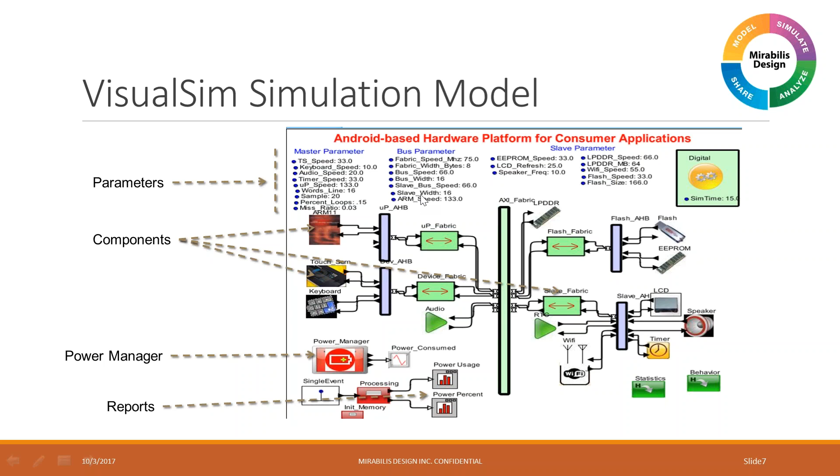There are a lot of reports and analysis tools built into the environment that you can drag and drop and utilize. And finally, there is the most important, the power analysis environment that gives you a complete power profile down to the device, application, and the subsystem level. So this is a complete platform that enables you to assemble your systems and then set up parameters for which you can do regression analysis through a parameter sweep process.

Some of the statistics that are generated, and we'll be going more into it, is you can get statistics in terms of timing diagrams, the latency or throughput, and power consumption. You can also get textual statistics that give you things like utilization, delays, buffer occupancies, and also statistics on a per device basis to give you an idea of what the cumulative average power is and things like that. What this allows you to do is very quickly narrow down what my architecture is going to look like and also where my system bottlenecks are. So very, very quickly, it gives you visibility into that type of information.

Now, VisualSim has a large library of predefined components. So it can range anything from processors to interfaces to memories to storage to networking components, but also a lot of components for you to build your own custom elements, such as, say, a latch, which you want to define for your hardware, or say, for example, a buffer with an arbitration scheme, has components to allow you to enable those as well.

Now, one of the key things VisualSim allows you to do is be able to provide a universal communication platform. So once the architect has constructed the model, done the analysis, tested it, and fully validated, it can be embedded in your document that can then be utilized by anybody else downstream for actually analyzing the system or using it for demonstration or generating reports that can be used for marketing purposes, things like that.

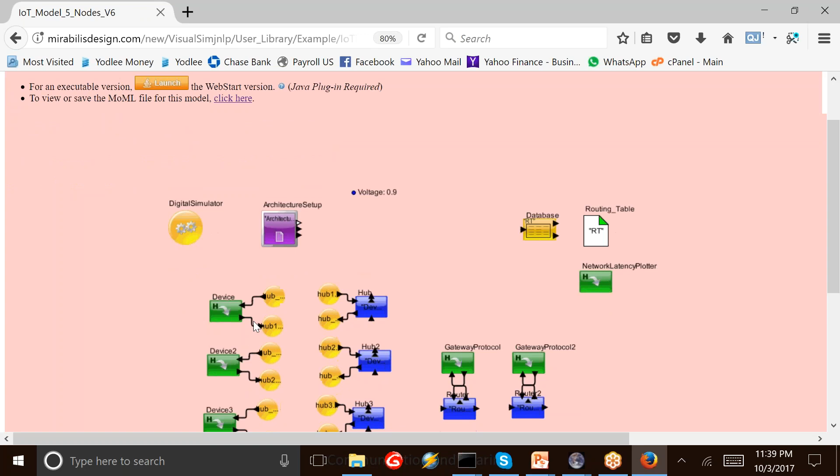So this is from our server in Florida, and as you can see, I'm actually bringing up these designs that have already been pre-built. In this particular case, it's an IoT-based architecture that I'm demonstrating right now. So when you create a model, one of the things you have the ability to do is generate documentation right out of the model. So for example, over here, I can run this and I can immediately see what are the attributes that are associated with that particular component. Or for example, on some of the networking things.

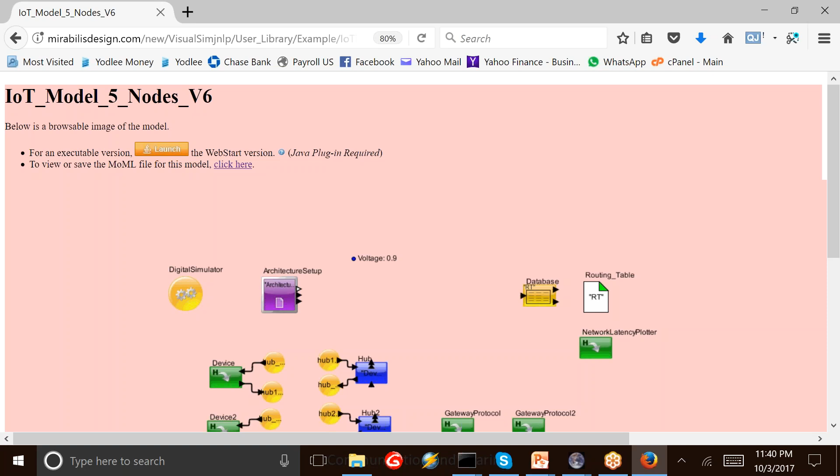But what I can also do right out of the documentation is I can actually click on this launch button and bring up the simulation model right from within the web browser. So anyone that has a need, say, they want to analyze their firmware algorithm, or they want to try to use a different NAND flash, or a different variation of the ARM processor, they just need to go change some parameters from within the browser, and they have the ability to get access to the model and run simulations right from within your document itself. So it allows you to extend the use of the model beyond just the architect's environment.

As you can see, it's coming up. The first time around, it takes a while to come up, but after that, it's extremely fast. In this particular case, I also have a lot of bandwidth on the GoToMeeting activities, so that's another reason why it can be a little slow sometimes.

So as you can see, this is a VisualSim model. You can see the libraries on the left-hand side. I can double-click on blocks, and it can show up its parameters. All from within the browser, I can click on this Go button, and it'll actually run the simulation as well. So it allows you to be able to communicate across your entire design chain.

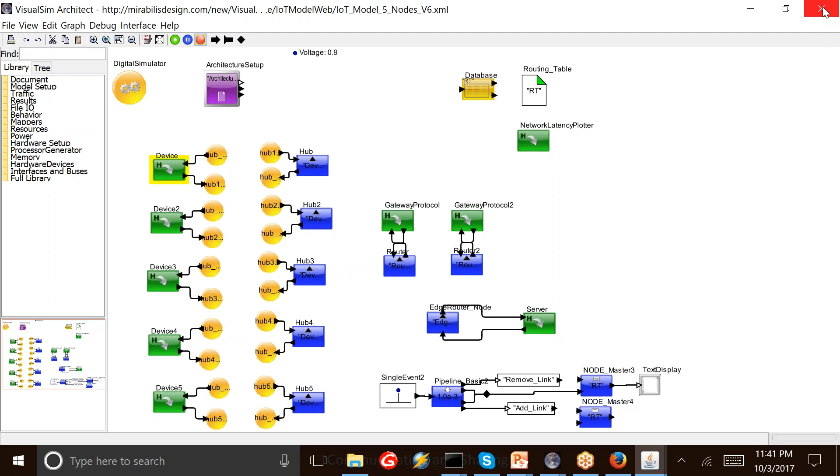Now, going back to the presentation, let's take a first look at the introduction to the network on chip. But before we do that, we want to look at all the possible on-chip communication components available. So when you look at common on-chip things, it can be network on chip, obviously, but you have point-to-point, token ring, crossbar, shared bus. There's a variety of different architectures.

And the selection of your communication architecture has a major role in terms of what is going to be the size of the chip, how many devices you can connect, what is going to be the response times, what is going to be the total power consumption of the SoC. All of them have a major impact based on the on-chip communication that you select. Also remember that even though you might have a network on chip, it does not mean that the network on chip is the only interface or bus on the SoC itself. There might be a lot of legacy systems that might require PCI Express or NVMe Express, or might require AXI with an ARM processor. All of that will also have to be considered when you're looking at the SoC.

Now, the specific topology or the specific communication interface that you need to use for your architecture really has a lot of the impact based on how many cores you're using, what type of cores, hardware accelerators. Are you looking at things like cache coherency? What is the available memory bandwidth?

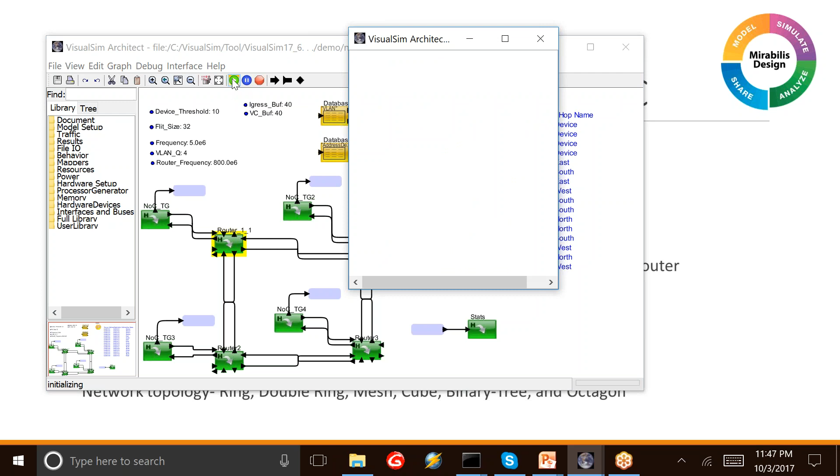So I can construct a model using these standard components out of the library, and when I click go, a variety of statistics are going to come up based on the attributes that I've set up for those traffic generators that emulate the different devices. So here, for example, you can actually see the buffer occupancy for each of the routers over here for the different directions of their connectivity.

But what you can also see is things like what is my end-to-end latency. Notice there's a spike in your response time, but after a while it follows a small range. So it says that the buffering is actually tapering it off so that you cannot have more data. Most likely it's actually dropping some data right there.

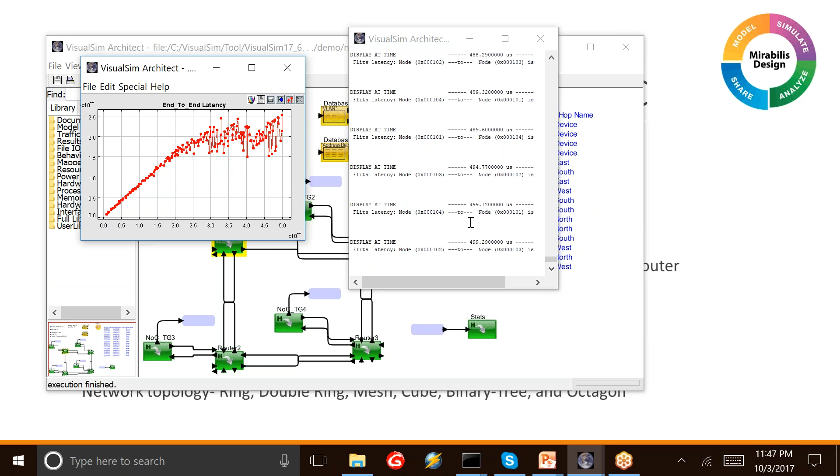Now what you can also see here is the latency from node to node during the tracing process. So it allows you to gain visibility into your entire architecture.

So using this, you can connect different types of architecture. In this case, as I said, it's a mesh. You can make it into a ring architecture. You can make it into other types of architecture as well. These blocks automatically support that.

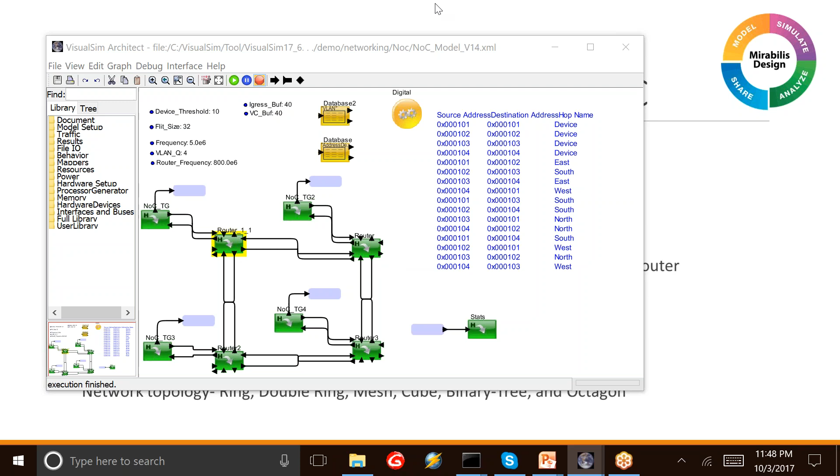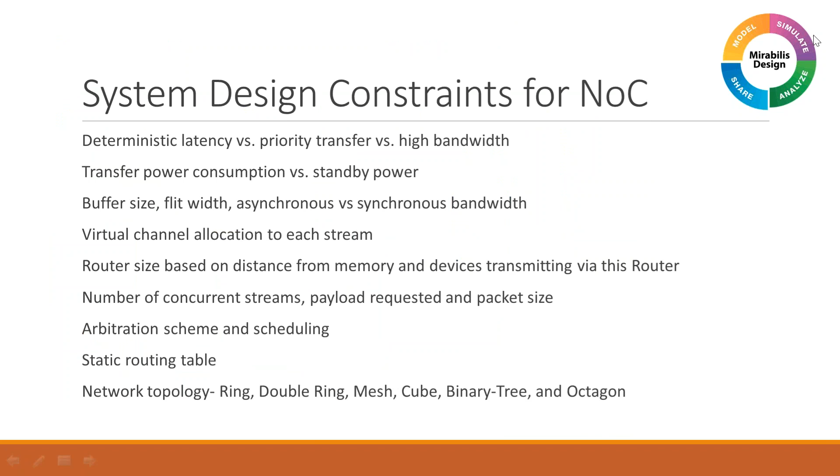Now, one of the key things to think about when you're creating something new like a network on chip is that you need to have a platform where you can explore or evaluate the different possible architectures. So one of the things we at Mirabilis Design provide is a modeling and simulation platform. And this platform has a large portion of the components you need to assemble the system.

So for example, as I showed you, it has a router, and the router has buffering, timing latch, and static routing table. Also, as I showed you, you can actually change the configuration to go from a mesh to a ring to some other configuration.

As you saw in the list, we also have a large library of components like PCI Express or AXI bus or AHB or NVMe Express or DDR4 or LPDDR or ARM processors or other types of technologies. So the idea is that you can take not just the network on chip, but actually assemble the full SoC into your system model.

One of the key aspects of network on chip, which is a major problem today, is simulation time. Because these NoCs get really large and the routers get really big, if you do a cycle accurate model, it tends to slow down extremely fast. And that's one of the problems the library blocks we provide eliminate, where it maintains cycle accuracy but still provides you the flexibility to try different regression simulations and do it very, very fast.

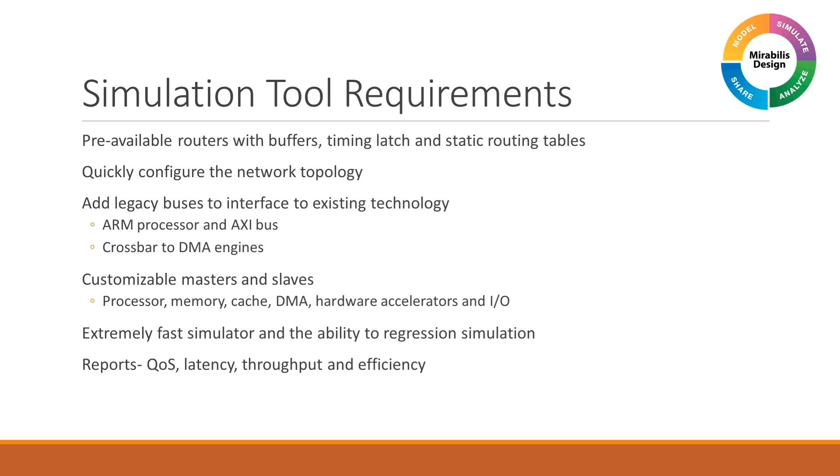Now, why do you do system design? One of the reasons is in the past there was always a dedicated flow from source to destination, or master to slave. Now, in today's systems, you have a few different things. One is there's going to be a lot of contention on the buses.

The second is there's going to be multiple concurrent tasks running that have to be scheduled, which means it's no longer just data going to task 1, task 2, task 3, task 4 in 4 different devices, but rather they're all distributed, and they're competing for access to systems based on additional tasks or additional data packets that might be processed through the particular system.

So when you have something like this, the topology is really motivated by what is happening in your software tasks running on top of this particular system. So for this particular design that we just showed you, we ran a simulation where we did a test between 200 megahertz and 400 megahertz.

The 200 megahertz, as you can see, had higher latency in most of the cases, except at a few points here where the 400 megahertz actually took more response time. So what this tells you is that just increasing your bandwidth or your clock speed does not necessarily guarantee better performance.

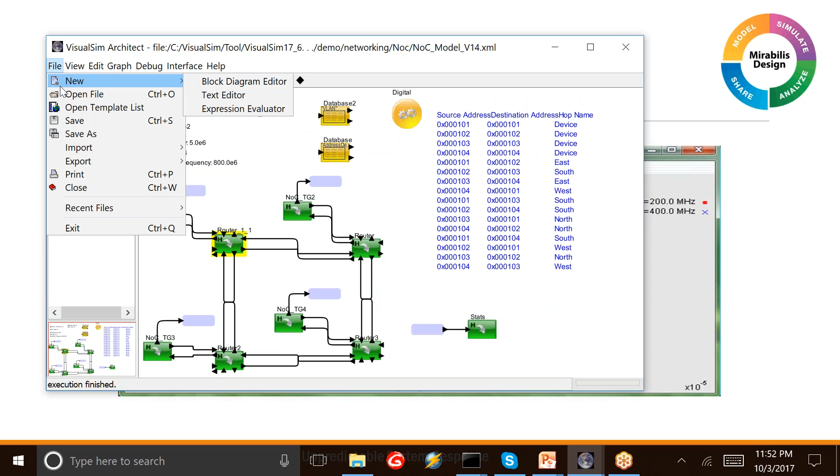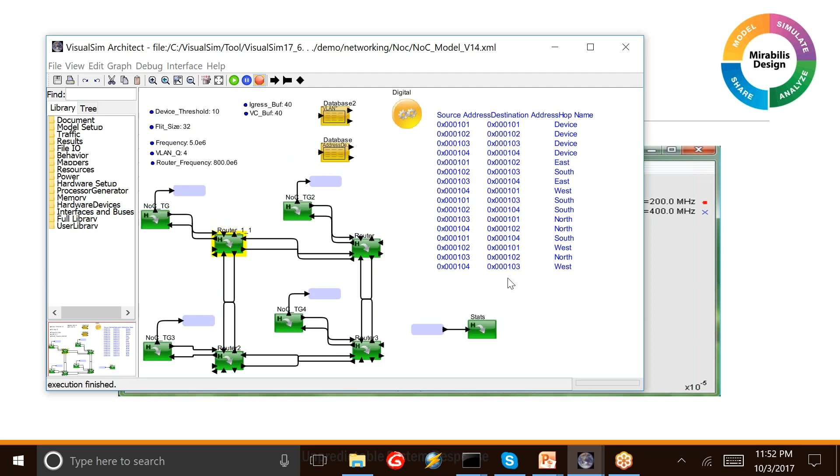So one of the things you'll notice in VisualSim is that we have a large library of demonstration systems, or what we call application templates, available in the environment. The reason is it allows you to very quickly build up the models that pertain to your particular system.

So as you can see, this is the block diagram of the architecture that we saw earlier. These are the two software flows. We've got other types of statistics like the power tables, statistics, analysis tools, reports, things like that. We also have tables here that are the parameters that are used for regression analysis. We're going to go ahead and run the simulation. And one of the things you're going to see is that there's going to be a variety of statistics.

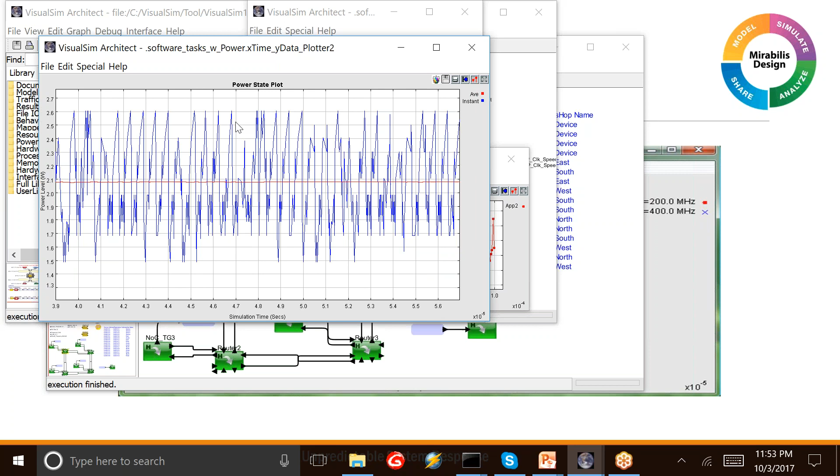So for example, this one here shows me the red line, the average power, while these peaks here show me what my instantaneous power is. So one of the things you'll notice is that most of the time the power is below this range here, and there are just a few peaks up here that actually increase my cooling cost that I have to be aware of. So this allows me to know in advance, at least provide input to the mechanical guys on what my expected power consumption or energy is going to look like.

You get other types of statistics, like for example, a breakdown of how much of it is the messaging part, which is the data transfer or data movement, versus how much of it was the actual processing. So if you look in application 1, you'll notice the processing is these red things, but the transfer, which is going across the buses, is the blue. While in the case of application 2, you'll notice that the processing is a much higher percentage, while the actual transfer is much smaller. So this is only the transfer, while the light greens over here are the actual processing.

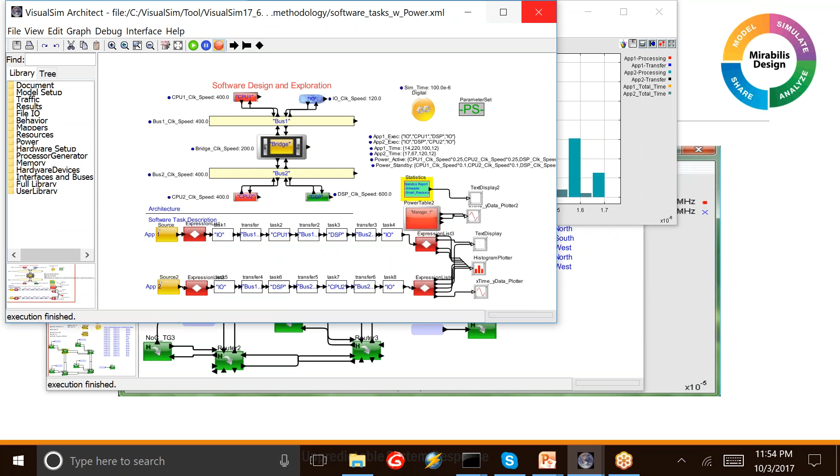So you can see one of them has more impact on the buses themselves, while the other one has more impact on the processing resources. So you can actually evaluate where your bottlenecks are or what resources require more adjustment in your architecture based on a simulation model of this kind. And that's where you can really figure out where you're going to have these kind of unpredictable responses in your particular design.

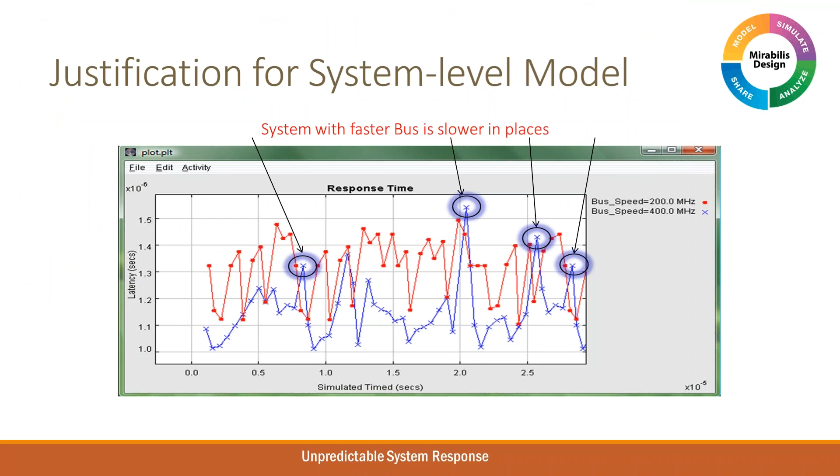Now let's look at the network on chip. One of the things that you do in VisualSim is you don't actually build these models at an RTL or SystemC level. Rather, you have the ability to define the entire chip right over here, but you don't actually put in, for example, each of the wires and things like that. Rather, you have your input port, your output port, which is resembled by this, an input buffer, an output buffer. It has the power, which is using our power library, but the actual data movement is done through what are called transactions. That's why we call this a transaction level model.

Now, the actual data movement through the system still happens the same way. It still incorporates the latencies associated with the handshaking and things like that, but we don't have separate wiring here for writing and reading and things like that. So if you look at a comparison between an RTL or a pin level model and a system model, all the attributes, your width, your clock speeds, your buffer depth, your scheduling algorithms, your arbitration, all of that is maintained. But what is not maintained is I don't have a pin by pin, rather I just send one transaction that actually takes care of all the pins and also takes care of the handshaking process. The data and control logic is still maintained.

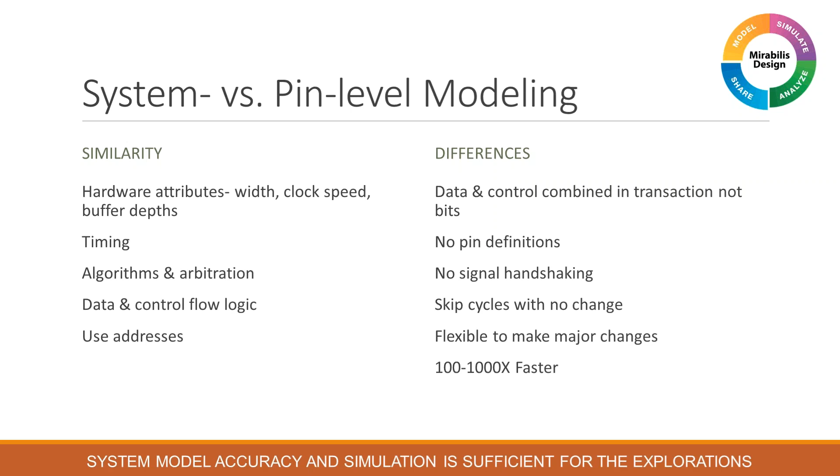Now, let's take specifically the network on chip library that we provide you in VisualSim. If you look at any one of them, there are essentially about 5 aspects that you require to be able to define the network on chip. The first and foremost are the traffic generators, which essentially resemble the devices. The second are the routers.

So for example, the routers have a variety of parameters: frequency, the coordinates, which is where it's located, the ingress buffers, the virtual channel buffers for each of them, the router addresses, the VLAN clock cycles for each of the virtual channels, things like that.

The traffic generators themselves, you need things like, for example, what is a frequency rate, what is the data size range, because now we're talking about packets. What is the data size range? What's the flit width? Which VLAN is each one of these streams associated with? All of that kind of information. So this describes your topology and your host devices.

Outside of that, what you do have is you need to have something that tells you what your VLANs are and what is the bandwidth, what is your static routing table, and then you have a series of parameters and statistics library components that are utilized for you to be able to run regressions and get the reports out. So these are the 5 elements that are required to assemble a complete network on chip design.

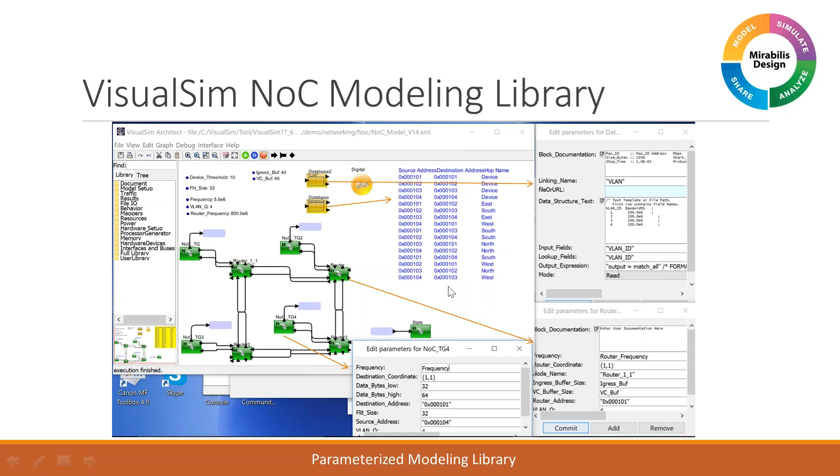Now, these blocks here are fully scalable, where I can just have 20 of these blocks, and it becomes a different type of topology. So I do have the ability to very quickly create alternate topologies as well. Now, a variety of predefined reports.

Some things show you the latency of the packets going from a source to destination, show you what my end-to-end response times are, show what the buffer occupancy is for each of the routers in each of the directions. So you can actually see which direction is consuming. Like, for example, over here, you can see the south port, router 1.1 and the buffer length. That's the one that's being buffered the most.

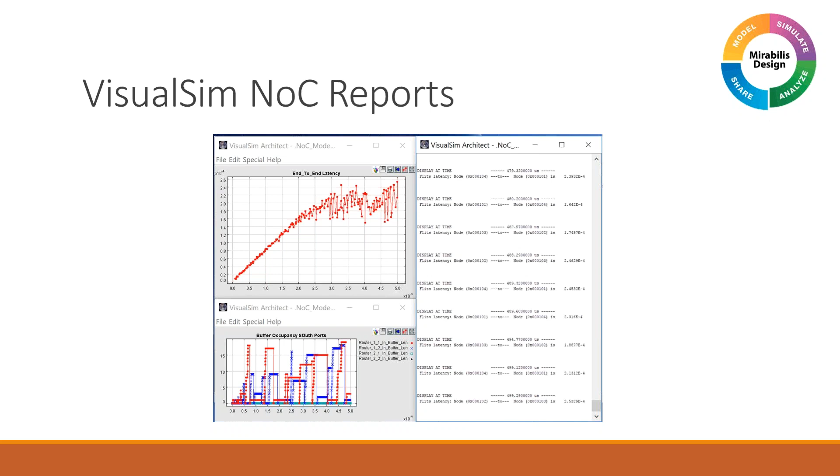And then you can see the green one, which is router 2.1. Notice there's hardly any buffering. So this tells me that there's a lot of activity right now in the south port for buffer 1.1 and for buffer 1.2. So those I have to look at. Do I want to distribute the traffic to some of the other nodes as well? So that would be part of your regression analysis that you'd want to run.

Now, an alternate to a very detailed or cycle accurate network on chip is, a lot of times people don't implement a very rigid network on chip. They use a more flexible mechanism where it's partially network on chip, partially a router, partially a switch, and then maybe partially even just an AXI bus. So what we've done is we provide you a variety of components.

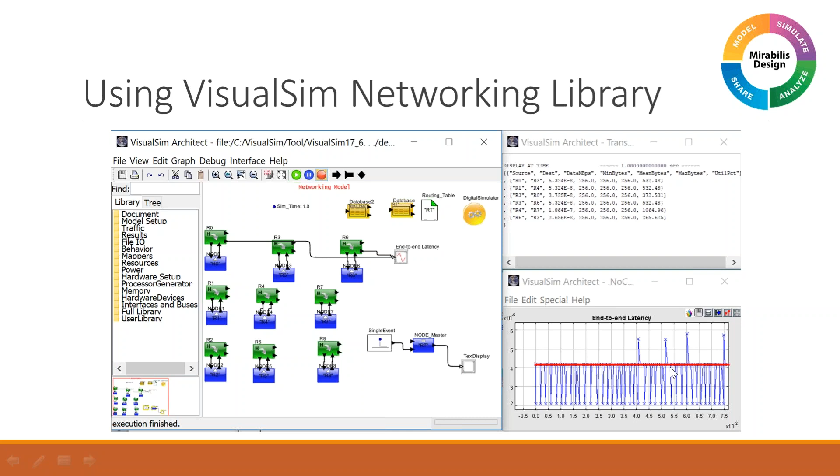Of course, we provide network on chip, but this is more of a routing system with nodes associated with each of the destinations. We provide you this kind of a library where you can still get the routing table, and you can get statistics on each of the links. You can get what your end-to-end response times are, while at the same time, you can also incorporate details of the rest of your hardware. As I mentioned, things like the AXI, the traffic generators, your processor, things like that.

Now, one of the key things you can do in VisualSim: what we saw until now was really about putting the performance together and putting the functionalities, like in terms of arbitration and scheduling. What you can also do in VisualSim is actually combine it with the power consumption in your system. Most times today, power is done using just an Excel spreadsheet or maybe some simple Python scripts.

But one of the things we've noticed is you reuse the same thing, but then when you run the simulation in a more discrete event, dynamic simulation, what you'll notice is your expectation here, which could have been a combination of taking the average of these and putting it in, or taking the worst case, is completely off from what really ends up happening through the particular design.

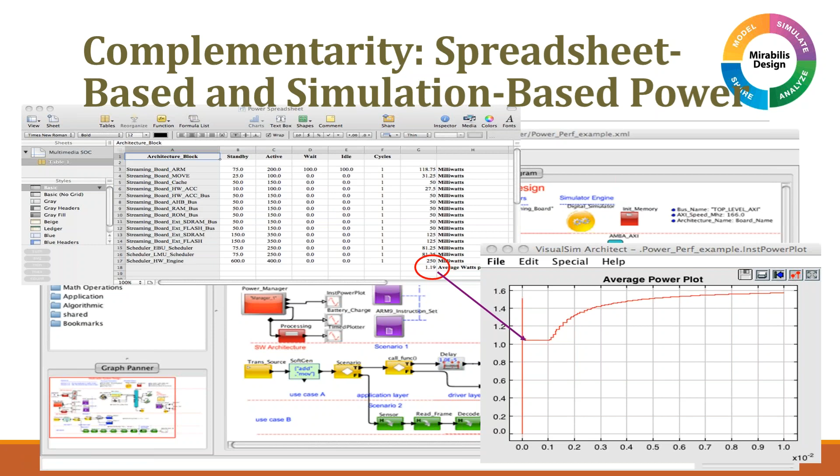So as you actually are sending real packets through it based on different device requirements and based on their different commands, read and write commands to memory, for example, the power consumption will look dramatically different. So it allows you to take an analytical spreadsheet model and extend it into more of a simulation-based power analysis.

Now, when I look at power, there's a lot of reports that I can look at. For example, I can see what the battery charge was. I can look at what's the instantaneous power and the average, what was the application response time, what was the total power discharge.

So it's a variety of statistics that can be generated right out of the power library. In addition to that, we also give you a trace of exactly what state each device was in over the period of the simulation as a timing diagram, and also as an XML file that you can potentially import into an FSDB that can be used to run in your RTL environment as well for your power verification. We also generate a lot of these into Excel spreadsheets that you can then use either for marketing or even for presentation purposes as well.

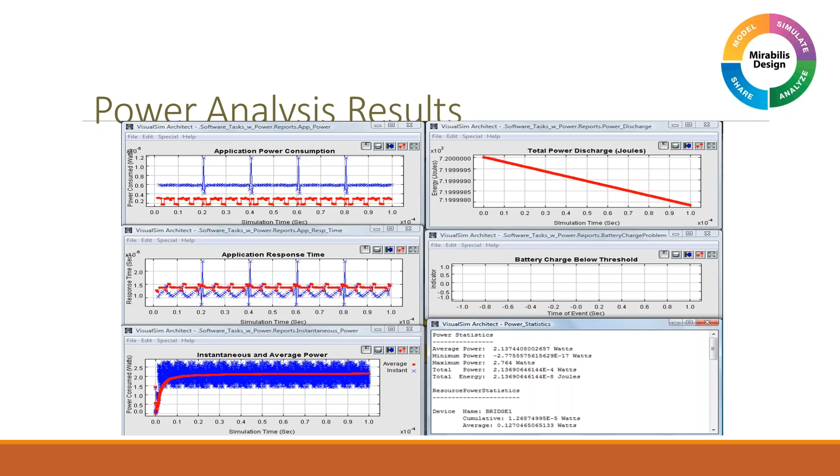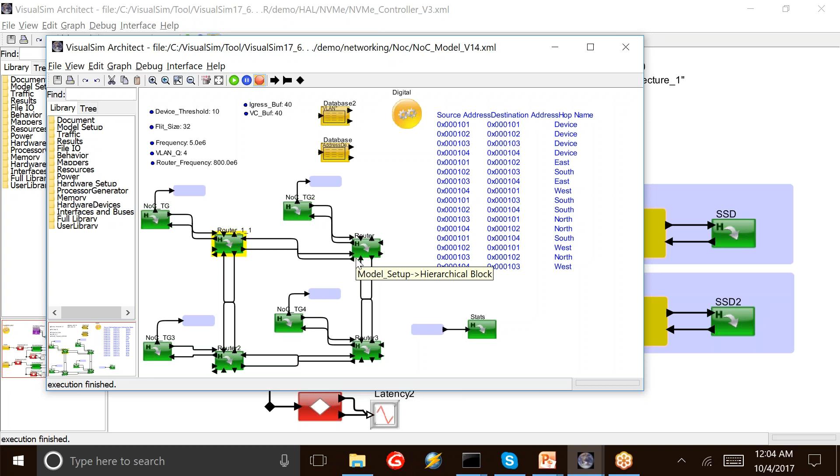Now, with this, I wanted to go into some of the demonstrations that we have constructed in VisualSim. So, for example, over here, what we have is an architecture that uses two different types of topologies in the same system. What you saw earlier on with the first design is it was purely a network on chip. So there was only one single technology that was utilized to assemble the system. Now here, actually it's not the right model.

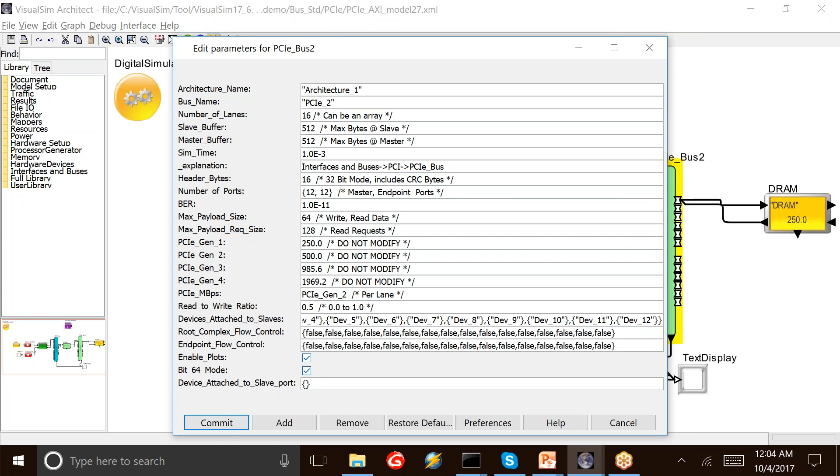Here, for example, I can combine a detailed AXI bus, and notice the number of parameters associated here to create a cycle accurate AXI bus, and combine that with a cycle accurate PCI Express, and I can enter in a DDR3 or a DDR4 DRAM block as well. So you can combine all of these within the system.

You can even take it one step further, where the PCI Express could have an NVMe controller running on top of the PCI Express. So it's possible that you can have your network on chip connect to an AXI, connect to a PCI Express which has NVM Express on top of it. So it allows you to put your legacy, your new generation, and a network on chip all within the same design as well.

Now, when you run some of these simulations, each of the simulations, depending on what analysis you're trying to do, will give you a completely different output or completely different statistics. So for example, over here, you can see it's showing you the statistics. I'm just going to let it run for a few seconds. Now this one is running for about 150 microseconds.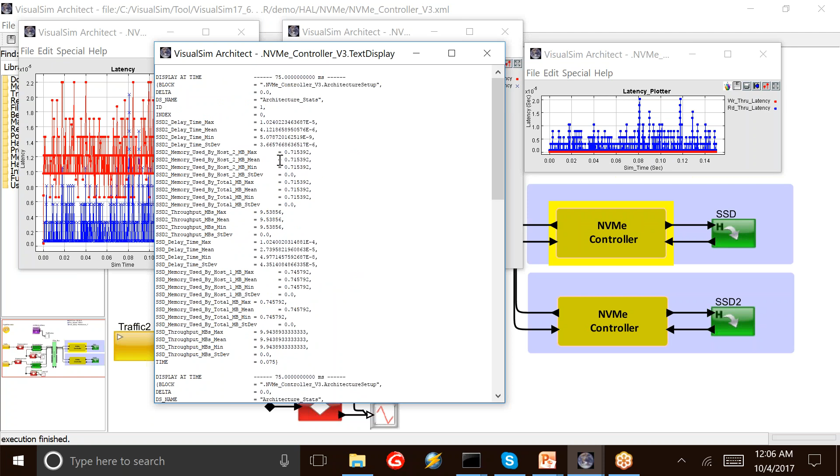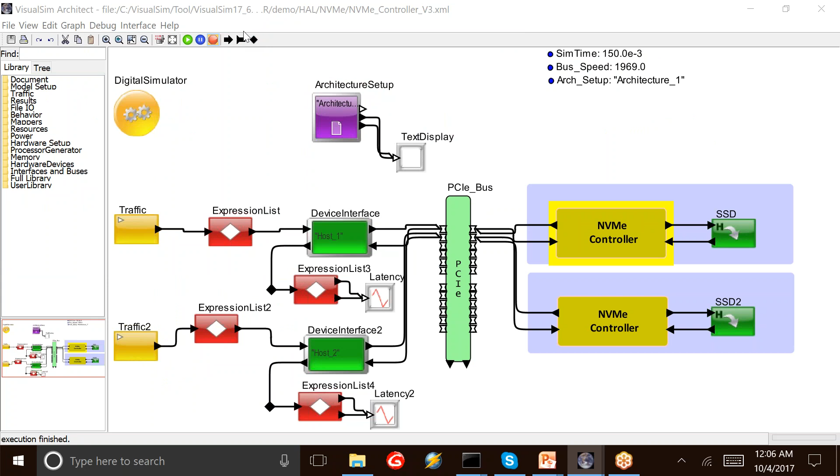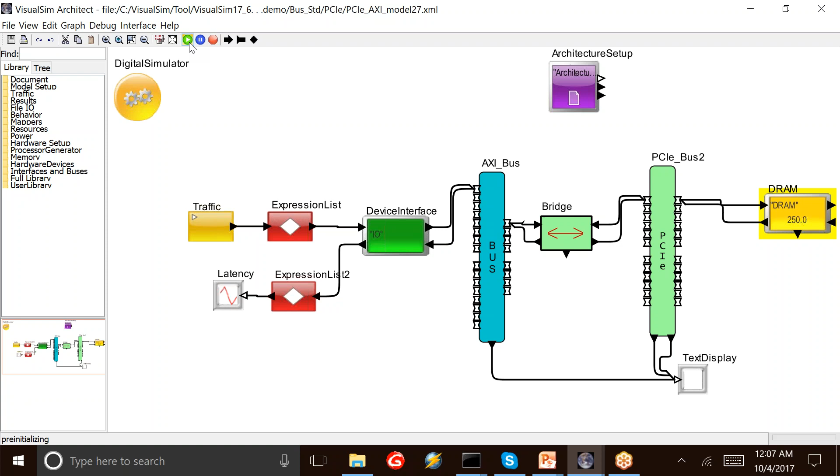So the main idea is that when I create a model and I run a simulation, I automatically get all these predefined reports that help me make decisions on what my topology or my architecture should look like. So for example, same thing, but here it has an AXI bus as well. When I rerun this simulation, I'm going to get a completely different set of statistics out of the particular design.

In this particular case, in addition to the standard statistics, I'm also getting a detailed report, like a trace on which slave. I get, for each of the queues, who's doing what, but I also get, when the slave comes in with the data, whether it was a read, which ID, which source and destination, what the data size is. So I can get detailed statistics or detailed reports on what is happening through the particular system.

So that way I can identify if there are any system bottlenecks that might be occurring as a result of either a stream generating a huge amount of data, or very large size data, like say video data, that might be causing some of these systems to slow down, causing some other streams to have a more extended bandwidth or a larger latency, while this video consumes a much larger bandwidth.

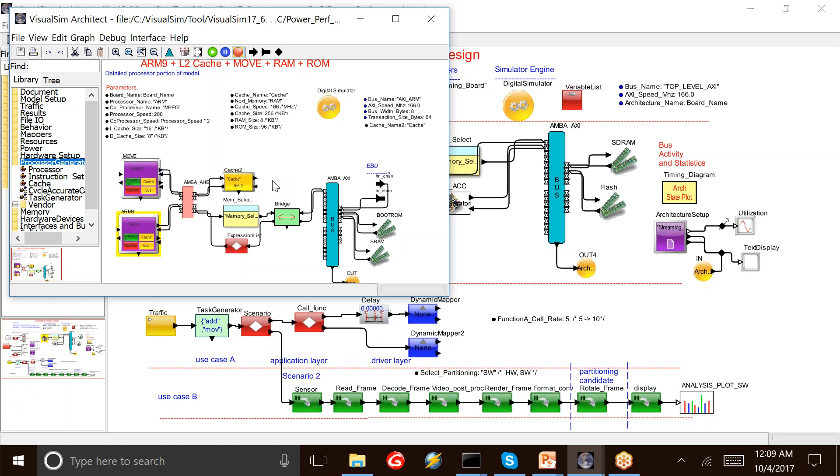Of course, there are other types of designs where I might have a complete SoC here, which has an ARM subsystem that is connected through a variety of buses that would have, for example, the detailed pipeline and the attributes associated with defining an ARM processor. So again, this is taken out of a block here called a processor generator that allows you to assemble it. Similarly, you have cache blocks that you can set up in each of the network on chip destinations, and that way build up your cache coherency as well, where it connects up to an external DDR memory.

The power table over here is extremely detailed. For each of the devices, you can have any number of power states. You can have transition times. You can have power management algorithms that you can define here. In this particular case, if it's sitting in standby for a certain period of time, I can move it immediately to an idle state. One of the things with the network is that if it's not doing anything, it's still consuming a huge amount of power. So you want to be able to utilize technology that can shut down the power completely to some sections of the network, or maybe to some of the routers themselves. So it allows you to experiment with those kinds of attributes in your system.

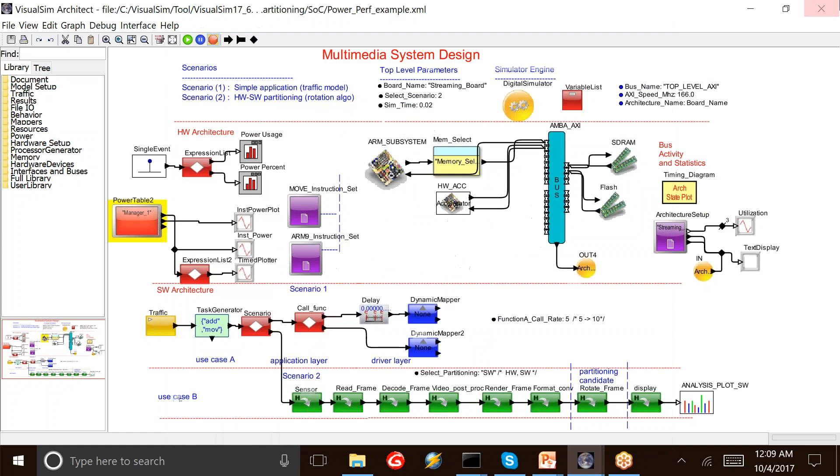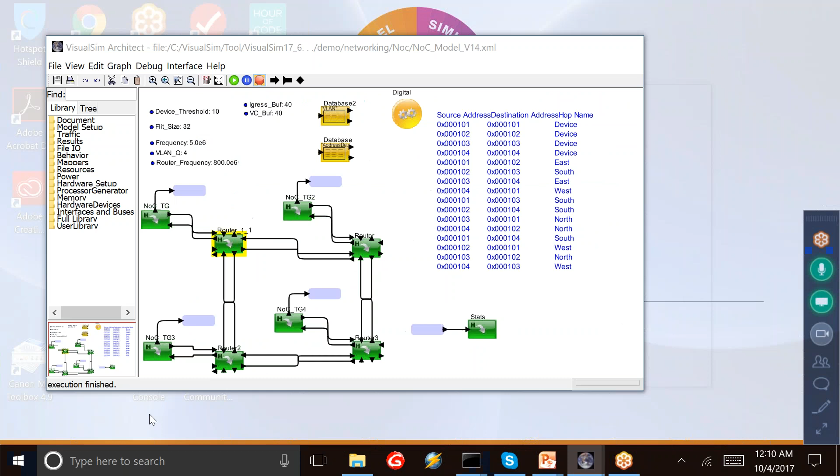The other aspect that you can also look at when you're looking at these designs is the address table, which actually is my routing table, which tells me what is the connectivity between all my components. So from here, I can go through this path to this destination, or I can go through this path to this destination. Unlike an internet network or an IP network, here we tend to use a static routing table. And in addition to that, within each of these routes, we have the virtual connections, or your virtual LANs, and you have assigned bandwidth for each one of these channels.

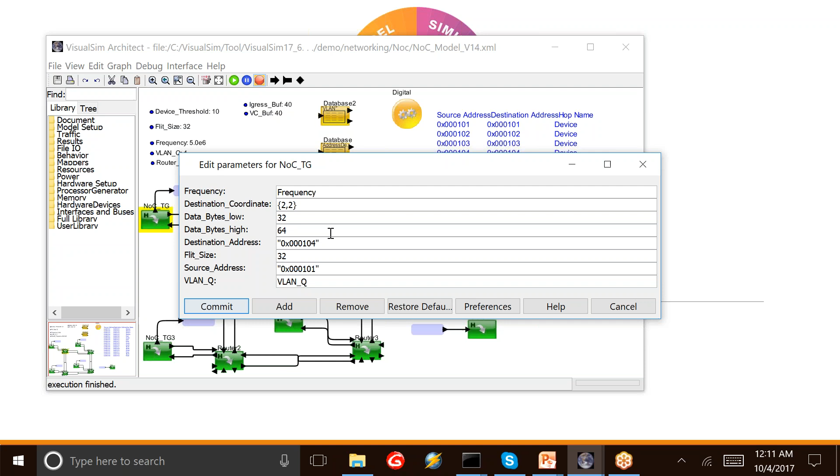The reason that's important is, for example, in the traffic generator, I can actually specify which channel or which virtual LAN I want to send it across. That allows me to ensure that certain streams get higher bandwidth, certain streams get very deterministic latency. It allows you to run those kinds of experiments, or create those kinds of configurations. Similarly, when I go to the router, I can also get the buffer capacity, the buffers, the router frequency, things like that.

Now notice one of the key things over here: the router frequency would be completely different from the network on chip frequency. For example, over here, notice the router is running at 800 megahertz. The frequency for the devices is running at 5 megahertz. Each one of them could be running on its own clock boundary. There's really no restriction on all of them having to be the same, and typically in the case of a network on chip, you have both synchronous and asynchronous clocks in your system. So you tend to have different types of clocks within your architecture itself.

The reason you have these parameters is because now, once you're happy with the model, you save the model, you're ready to go, you have the ability to actually run regressions where you can spawn off a large number of simulations with a variety of parameter values. So for example, just simple things like flit size. I can go with 16, 32, 64, 128. The router frequency: I can try what happens if I have 200, 400, 600, 800 megahertz.

Or ingress buffers. I could vary those ingress buffers and try how much capacity or buffer backup I really need to ensure no data is lost, and also to ensure that I'm getting the bandwidth and the timing performance that I require. So using the environment and the building blocks, you can very quickly put together the whole system and thus be able to do a variety of analysis.

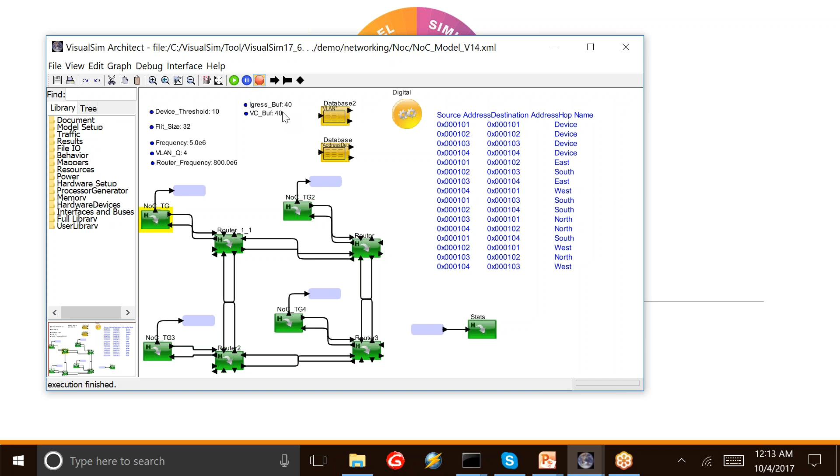So with this, I want to conclude today's webinar on exploring the power and performance of network-on-chip architectures.